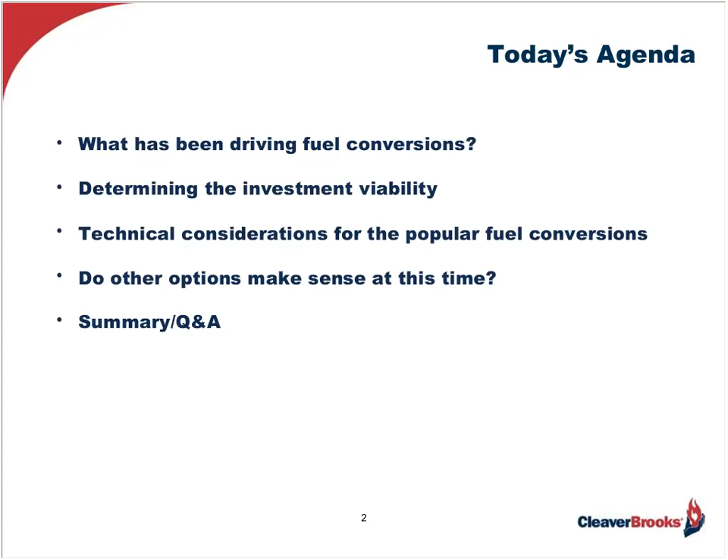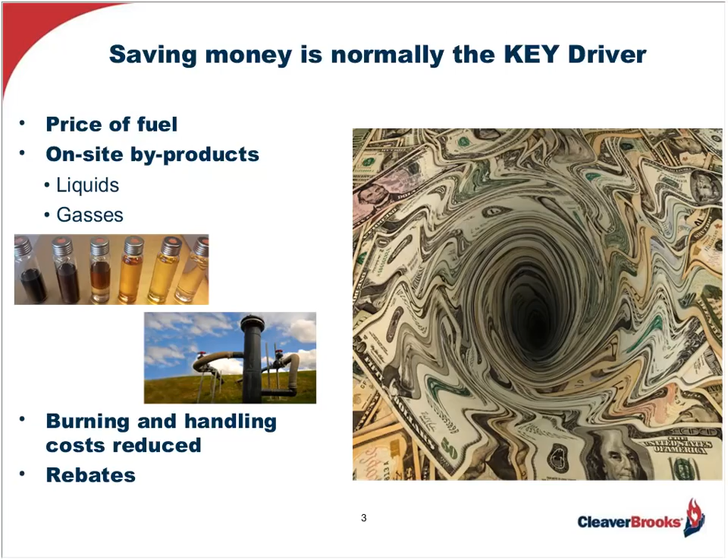Now, when considering what is motivating people to look at either adding a fuel, converting from one fuel to another, or just upgrading their existing equipment to burn a fuel more efficiently and reliably, the reasons are varied. But for the most part, the main driver is economics, or said another way, saving on that fuel spend. Unfortunately, if this is the only reason and one is uninformed on the other factors or the implications which might impact this fuel choice consideration, the expected savings can quickly become unexpected costs, but I'll address that in a bit. But before I do, let's look at the general possibilities for fuel cost reduction and where they may occur.

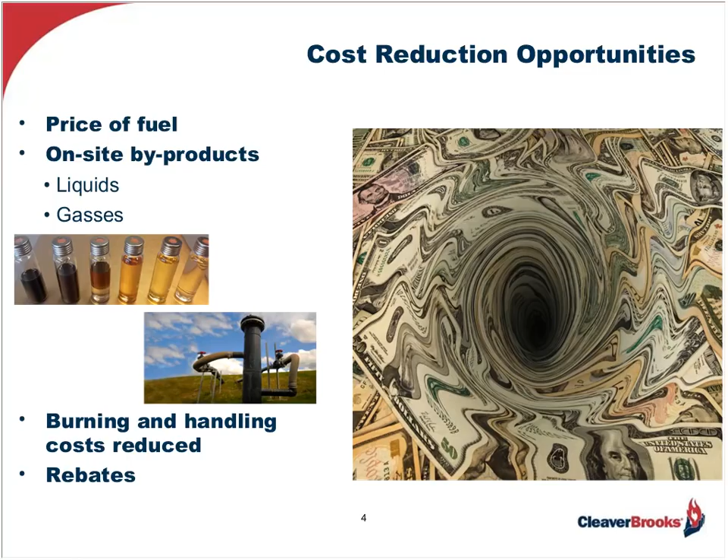First there's a possibility a lower cost fuel becomes available which was not present before, and this happens more than you would think. For instance, natural gas becomes available, and I'm currently burning either number 2 oil or propane. Now these two fuels, at least when I compare cost BTU to BTU, are more expensive. Then there's the possibility our manufacturing process may be producing combustible liquid byproducts, which we're currently paying to be disposed of. Or in the case of, let's say, waste gases, we're just flaring off. Or maybe we're burning a fuel which, when we look at the costs for burning it and handling it, can be substantially reduced if we change to a simpler fuel to burn. And lastly, if we have the capability to burn another fuel, it could lead to some very attractive rebates from either the utilities or other fuel manufacturers or both.

Now, the other major driver for fuel conversions is reliability, especially when we're involved with critical processes. And I think a good example would be pharmaceuticals. In many cases, a stop in the process can cost thousands of dollars, not an hour, but a minute. So having an alternate fuel backup can seriously help in making or breaking a financial month or a financial year.

The other major driver is local code changes, which normally equates to upgrades of existing equipment, but if it has to do with the EPA, the Environmental Protection Agency, it may indeed involve a fuel change in order to more easily and economically meet the required standards. For instance, changing from, let's say, burning oil to natural gas or propane will certainly positively impact NOx, nitrogen oxide, regulation limits. Then, of course, we have those situations where our fuel burning system is outdated, it's inefficient, and it's unreliable. So it's time for a change or a major upgrade to new burner equipment and maybe adding that change in fuel at the same time.

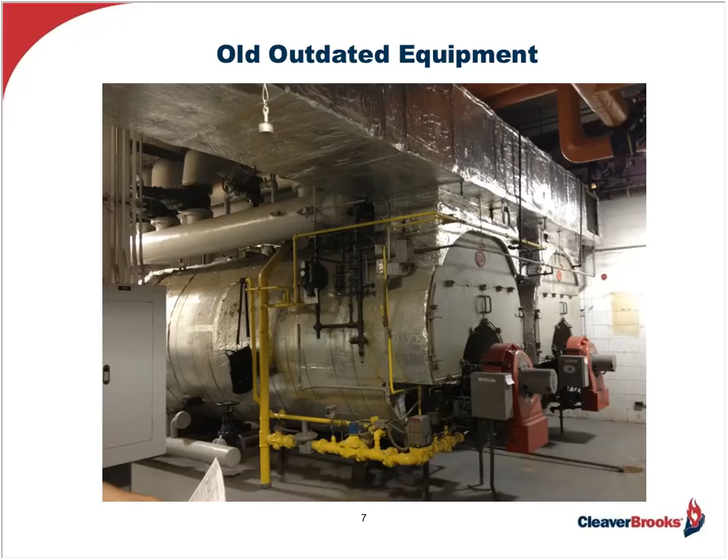And finally, we have the driver which has gained considerable legs over the past several years, and that's the environmental push. People across all walks of life have become so much more aware and educated about our environment, how finite our resources are, and how susceptible we are to dangerous pollutants, which can negatively impact us for generations. And as a result, we have many customers switching to cleaner burning fuels such as natural gas, while including NOx lowering capabilities to reduce the photochemical smog problem. Now, this, along with the burning of biofuels, which not only may save on the fuel spend while reducing pollution, but these fuels are also sustainable, all of which appeals to those embracing and highly prioritizing the environmental impact and the negatives associated with the burning of finite fuels with heavy concentrations of carbon.

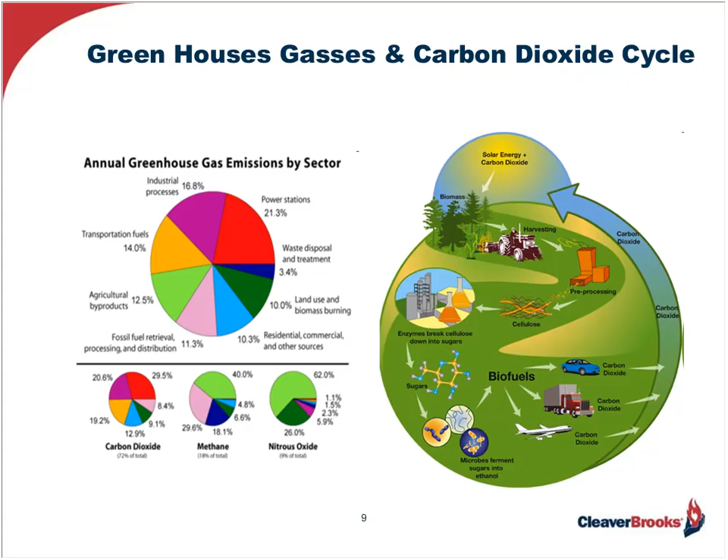Natural gas has been around for decades, and is the go-to fuel in many of our operations today. That's because of its benefits, starting with availability and the ease of handling. It's easily piped to the burner, and burning this fuel is pretty straightforward and uncomplicated too.

It also carries a very competitive price, especially since we in the United States have been tapping into many of the shale reserves discovered over the past 10 years, creating, albeit fluctuating, oversupplies.

Now, the other thing with natural gas, and this appeals to the environmentalists for sure, is its low carbon content, which lowers the amount of carbon dioxide released to the atmosphere, a precipitant of global warming, while also being clean burning, normally zero particulate.

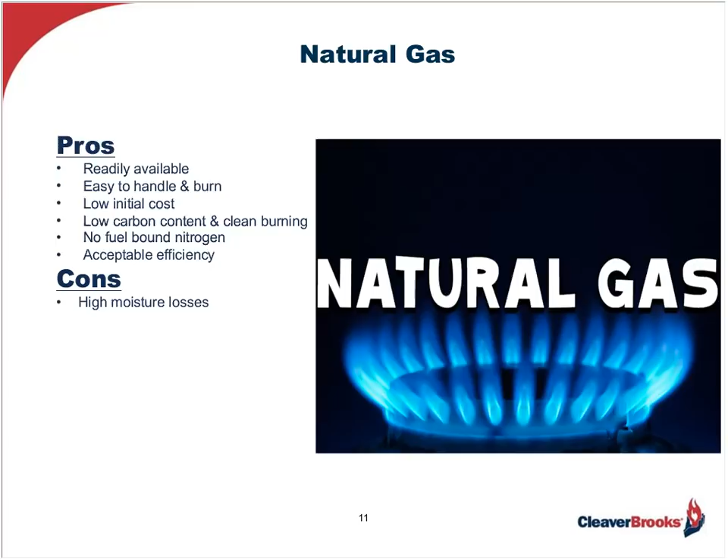Okay, what about the pros and cons for propane? Well, to begin with, just like natural gas, it's readily available. It's fairly easy to handle and burn, and I say fairly easy because it will require a vaporizer for burning it straight.

And a fuel-air mixer if it is to be reduced to the approximate BTU content of natural gas, which is about 1,000 BTUs per cubic foot, and then sent through the natural gas firing head in the boiler. In other words, use the same train. By the way, propane is about 2,600 BTU per cubic foot.

And like natural gas, it's clean burning, and because of its higher carbon ratio compared to natural gas, it has a higher combustion efficiency capability.

Now, on the negative side, propane requires on-site storage and the maintenance issues connected with that, along with assuring that supplies remain adequate. It has a higher carbon footprint, therefore more CO2 generation, which from an efficiency standpoint is really good, but not from an environmental perspective.

It's also more costly per cubic foot than natural gas, and if the propane is to be burned in the boiler without mixing with air to make it closer to natural gas, it requires a burner modification because of differences in the BTU content, the specific gravity, and so on.

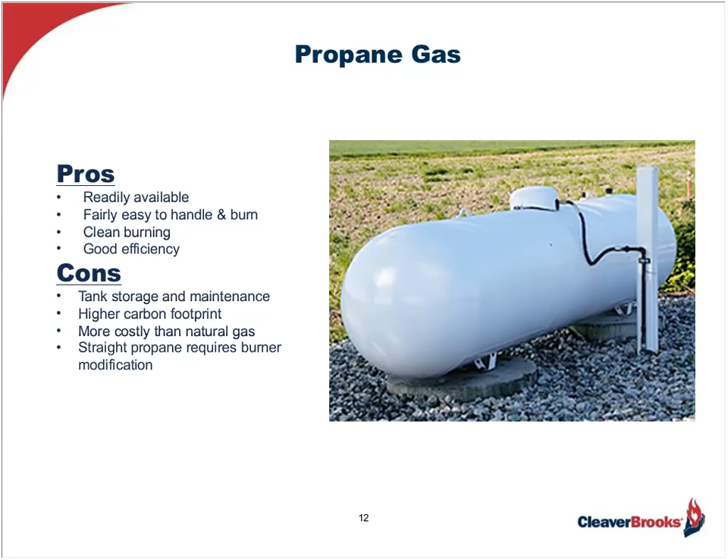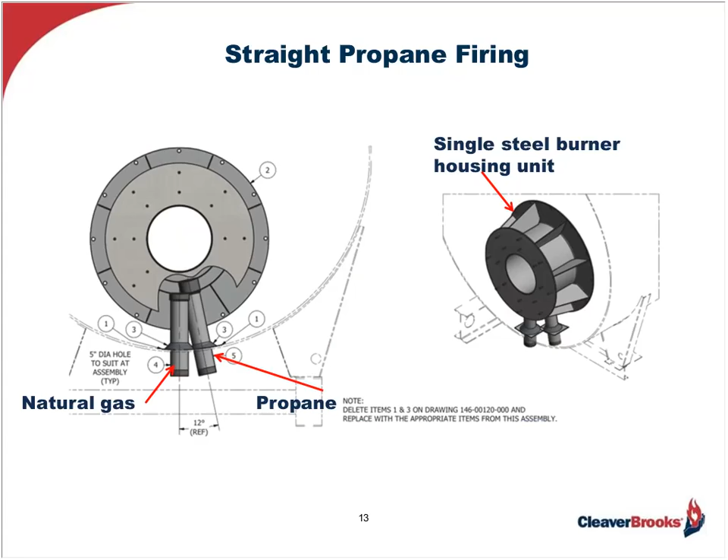That burner modification often affects the burner housing containing the orifices through which the gas emanates. In this particular example, we have what is referred to as a single housing, incorporating separate sets of orifices for natural gas and propane. They're separately compartmentalized within the same steel unit.

Now, as far as burning standard oils, let's talk about number 2, number 4, and number 6. Even though number 4 and number 6 have been pretty much regulated out in much of the country because of clean air restrictions, they're still used, but certainly not as commonly as number 2 oil. I think it's good to briefly discuss it anyway.

So when looking at the pros for both heavy and light oils, the first thing you have to say is they are both readily available. They're also delivering high combustion efficiencies, part of which is no moisture losses, making them an excellent primary or alternate fuel choice.

Now, when considering the cons for heavy oil, handling is an issue, including the need for heating it to the proper viscosity, I'm talking 200 Saybolt universal seconds, and the need for atomizing it with compressed air in order for it to exit the nozzle with sufficient misting and volatility for proper combustion.

The storage tank, housed somewhere in the boiler room, has to be heated in order for the oil to be pumped to the burner and then back to the tank when that burner is modulating and not as much oil is being burned.

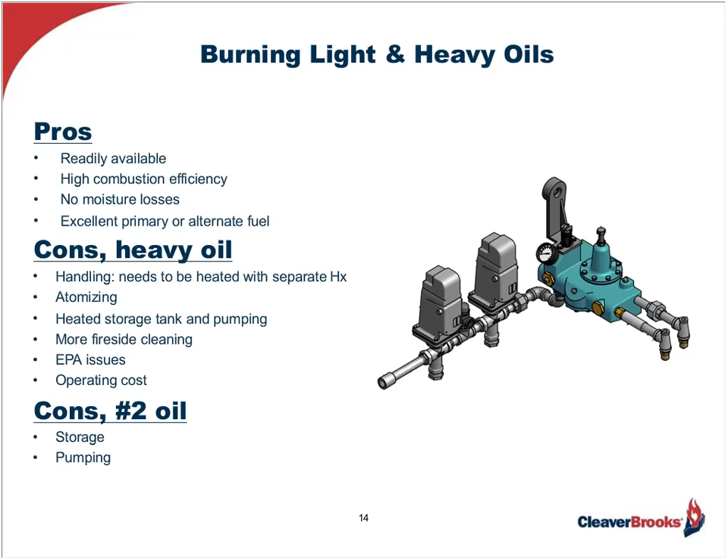But we still have to contend with the storage tank, though it's unheated, and pumping to and from the tank. Cleaning is probably going to be more frequent than when burning natural gas, and as a result, total operating costs, including the price of this fuel, are going to elevate.

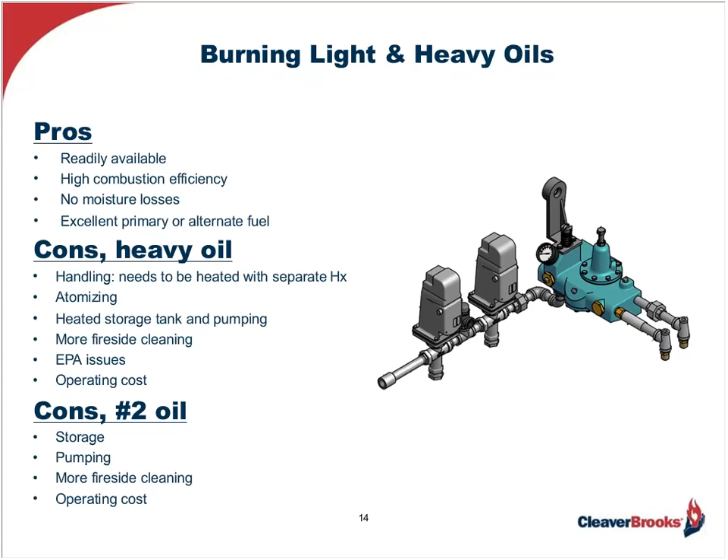Now, I might also add that an air compressor may be part of some burner packages to atomize the fuel, similar to heavy oil, but many manufacturers also use mechanical or pressure atomizing nozzles, thus not requiring a compressor in that particular application.

Okay, what about biofuels? Well, you know, this term is often used collectively and interchangeably, but if we break it down into the fuels within the heading, we find it consists of solids, of gases, and of course we have liquids. And what they all have in common is they are all sustainable because they're renewable.

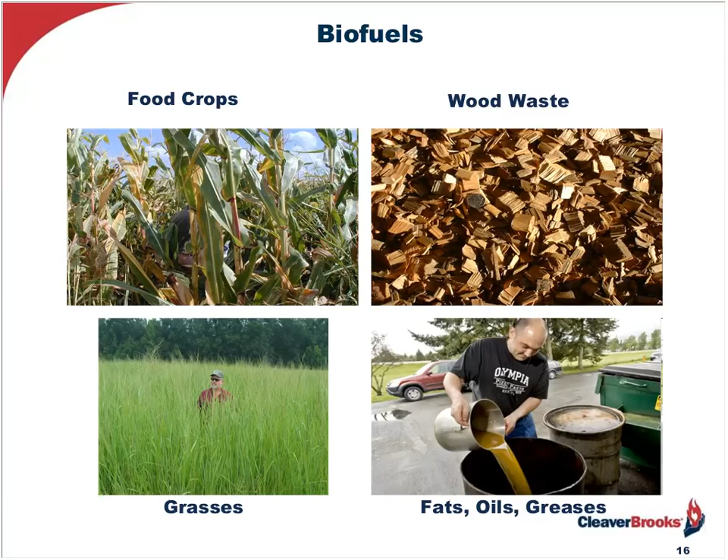For instance, we have solids such as corn, sugar cane, and grasses to make fuels such as ethanol. We have wood waste, which can be burned in boilers. And then we have various processing operations generating waste oils. We also have stores and restaurants generating fats. And they all have BTU value, and they can all possibly be burned in a boiler.

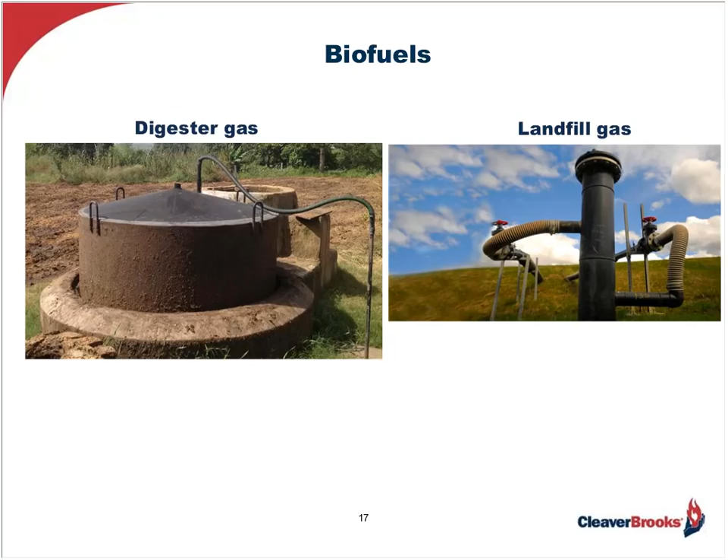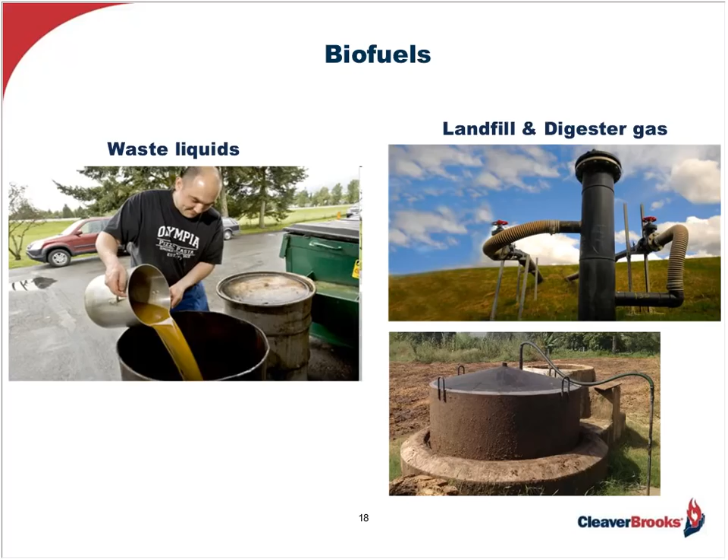We also have plenty of landfill sites and sewage treatment facilities producing primarily methane gas through what we call a microbiological degradation process. Now, this can be burned in boilers as a primary or alternate fuel based on the quantity and the ready availability of the supply. So for our discussion today, because of time constraints, I'm going to limit it to landfill and digester gas, both very similar, and then we'll talk about waste liquids.

And we'll start with landfill and digester gas pros and cons. Looking at the pros, this fuel is very inexpensive and maybe even free if the generating process is in the plant, and that's where the boilers are located. And next, it's a sustainable and renewable fuel, and it's environmentally friendly, having a very small carbon footprint.

Now, as for the cons, this fuel has a very low BTU value, probably about 500 BTU per cubic foot versus natural gas at about 1,000. So you need to burn more of it to meet the boiler's capacity. Now, it's also delivered at a very low pressure, meaning the gas train has to be larger to reduce pressure drops, or an expensive gas pressure booster needs to be added.

And it can be very corrosive with large amounts of sulfur contained within the gas. This means not only does the gas train need to be larger or the pressure boosted, but it also needs to be constructed of stainless steel, including the valve parts that would be coming in contact with this gas.

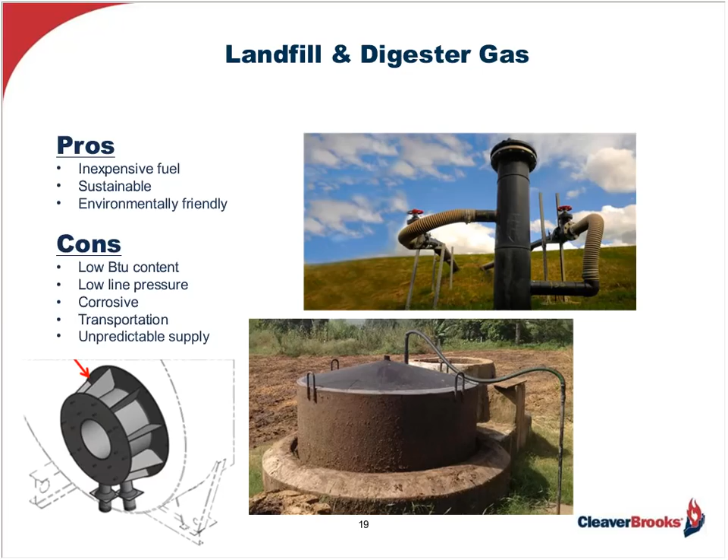And then we have the transportation issue. If you are not generating the fuel yourself on site, you need to be next door to the supply to be able to use it. And then finally, the supply can often be unpredictable, meaning this is most often burned as an alternate fuel when the supply is sufficient. This means if your primary fuel is, let's say, natural gas, you'll have two separate gas trains possibly coming into the same housing, that dual canister housing that I showed you before.

Okay, let's now take a look at waste oils and the pros and cons for using these fuels, which might be coming from waste oil recovery services, food services, meat processing, and maybe some chemical or pharmaceutical manufacturers. As far as the pros are concerned, they can be inexpensive to buy, especially if generated in the same plant, in which case the cost is zero.

But even if not, the generator of these fats has to pay disposal costs. So the price to the user may be very low, possibly just having to pick it up.

Secondly, normally these waste fuels can have significant BTU value and can burn at a high combustion efficiency. And of course, they're sustainable, which leads to some environmental pluses, especially when they are being gainfully employed and not dumped into the sewer, into fields or rivers.

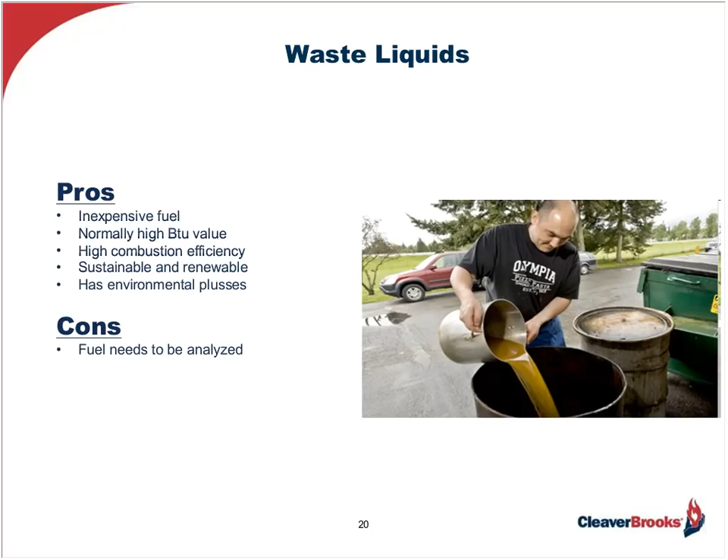Now, as far as the cons are concerned, these fuels need to be analyzed by the manufacturer of the burner equipment to make sure they can be burned without causing excessive deterioration of mechanical components, that they provide the benefit expected, and do not pose significant safety issues. Now, once that hurdle is crossed, the system has to be specifically engineered to assure proper combustion and maximum efficiency.

Now, this, by the way, might involve handling the fuel similar to what I previously outlined for heavy oils, such as preheating, atomizing, and so on. And then finally, there may be some air permitting issues to be addressed based on the constituents found in the fuel analysis.

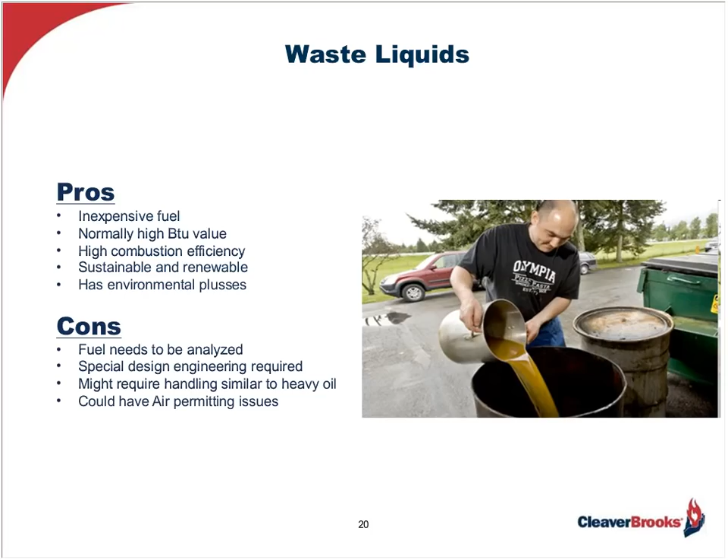All right, so we've covered the popular fuels being considered for conversion, including their pros and cons. So let's say we decide to further the process. What's the next step? Well, you know, if it were me, I'd make sure the boiler I was investing in was in decent shape.

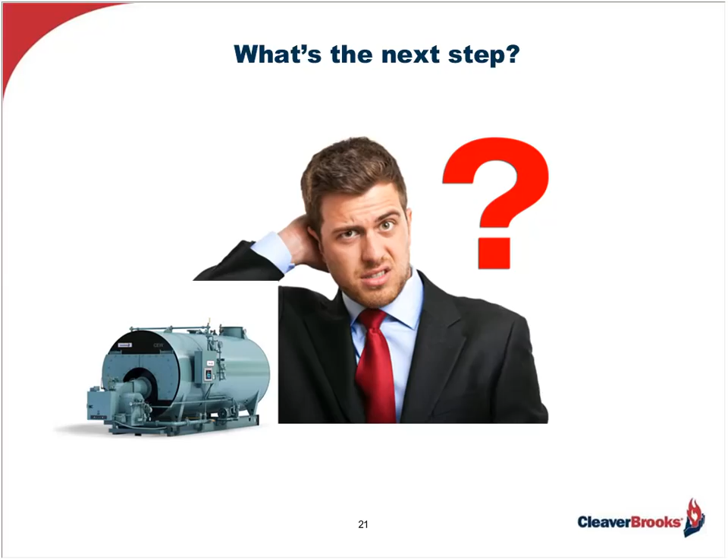You know, why invest in a dead horse, so to speak? Maybe it's time to make some upgrades with a boiler that still has life, or maybe it's time to think about another boiler, either a new one or a used one. In other words, take a hard look at the boiler and its key components to assure that they are sound before investing in the fuel change.

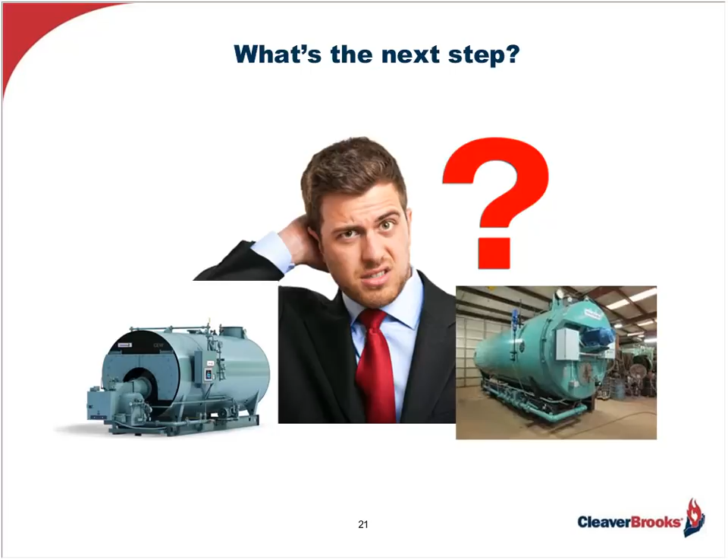And I'd start with the burner. Number one, is it in good shape, and does it provide good combustion efficiency throughout its turn down? And don't judge the book by the cover. These burners look like they've seen better days, but they actually perform very well.

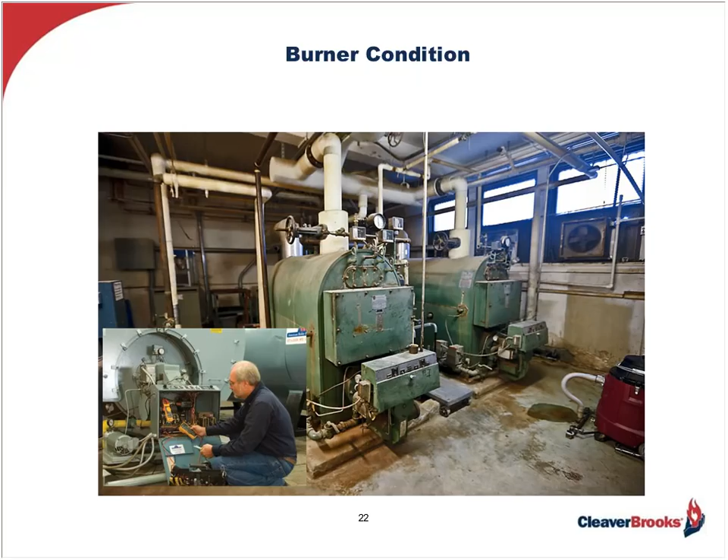Or maybe it's time to replace that burner, adding the fuel you intended to convert to. But in either case, keeping the burner you have or buying a new one, they have to be capable of burning the new fuel efficiently and reliably and safely.

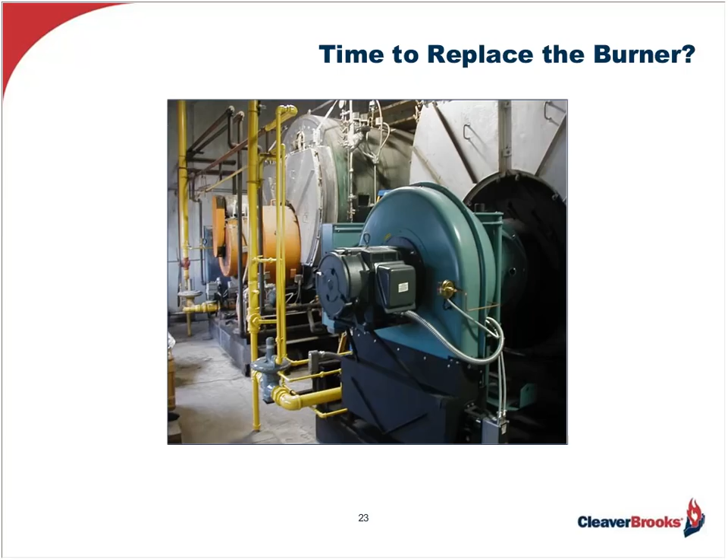Then it's on to the pressure vessel, making sure it isn't corroded or leaking or heavily scaled. Now, these can all be fixed, but the investment may just not be worth it.

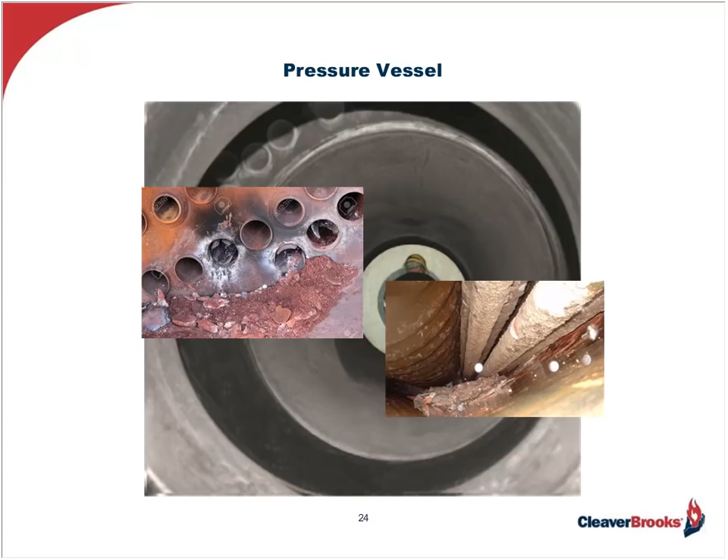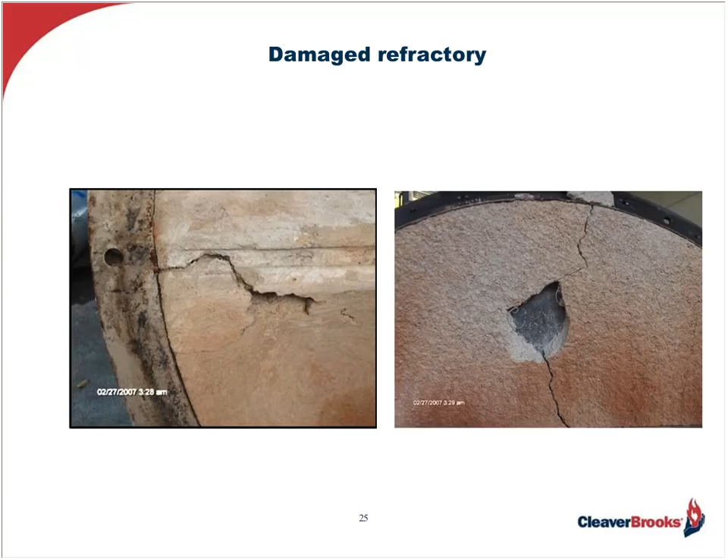And speaking of fixing what is wrong, fixing or replacing refractory insulation is a no-brainer. If it is compromised, as you see some examples of here, fix it as soon as possible, or efficient energy production will be sacrificed, along with serious mechanical and structural failures with the boiler following soon after.

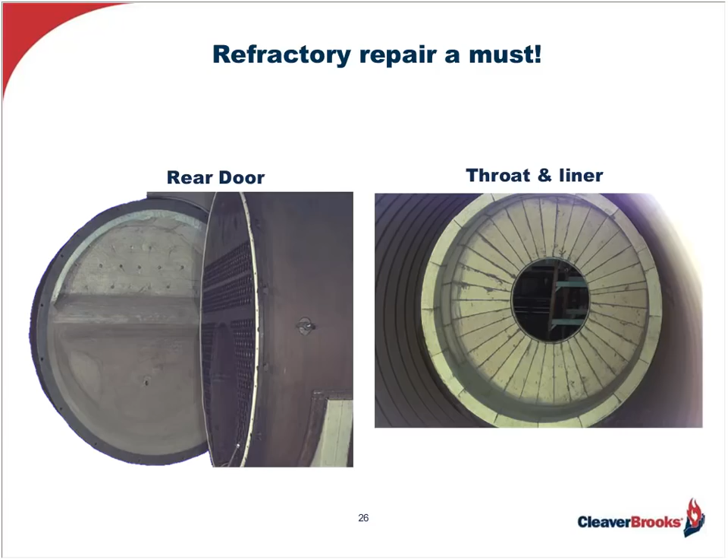Okay, we've decided the boiler is worth the investment. What does the conversion supplier normally provide with these fuel conversions?

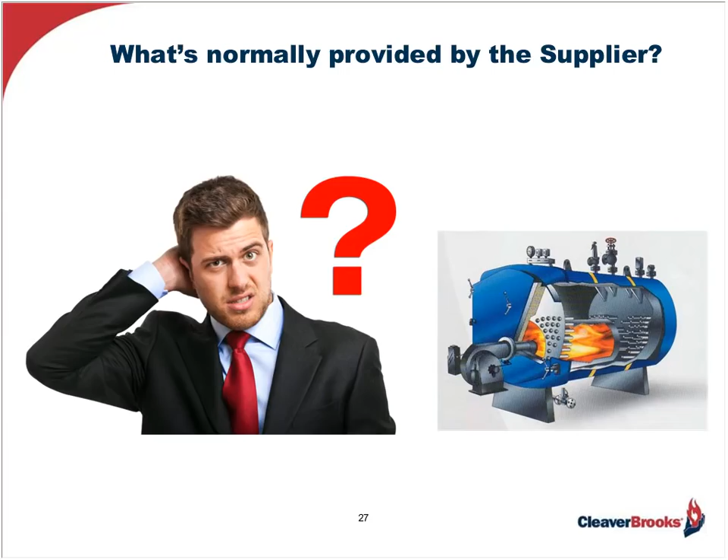And again, because of the limitation on time with these webinars, I'm only going to cover adding a natural gas conversion to a straight number 2 oil-fired boiler, and then we'll do just the opposite, go through a heavy oil to straight gas-fired boiler, because the heavy oil conversion also comes close to what we might find when adding a waste liquid fuel firing capability.

So overall, this should give you a good idea of what the supplier provides, regardless of the fuel being added or converted to.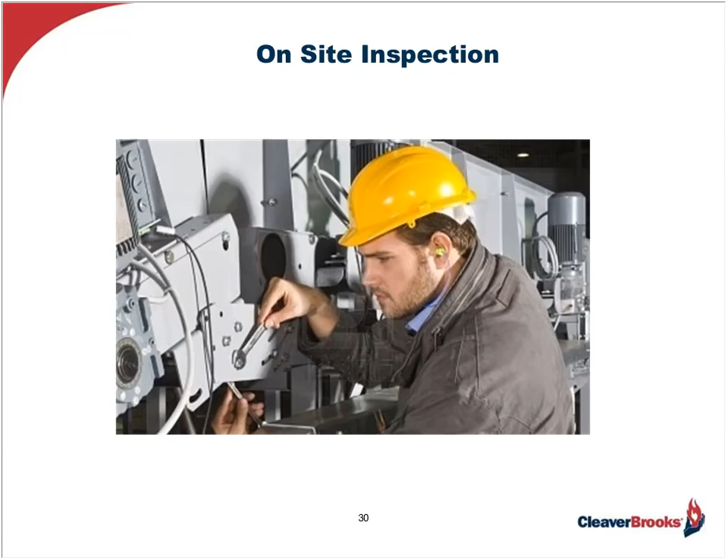So, starting with the natural gas conversion. The supplier has already had an experienced field engineer at the site to analyze the logistics of the room, including the existing utilities, as well as the details about the boiler, the existing burner configuration, along with its conversion adaptability, and then special note is given to the furnace into which the burner will be firing.

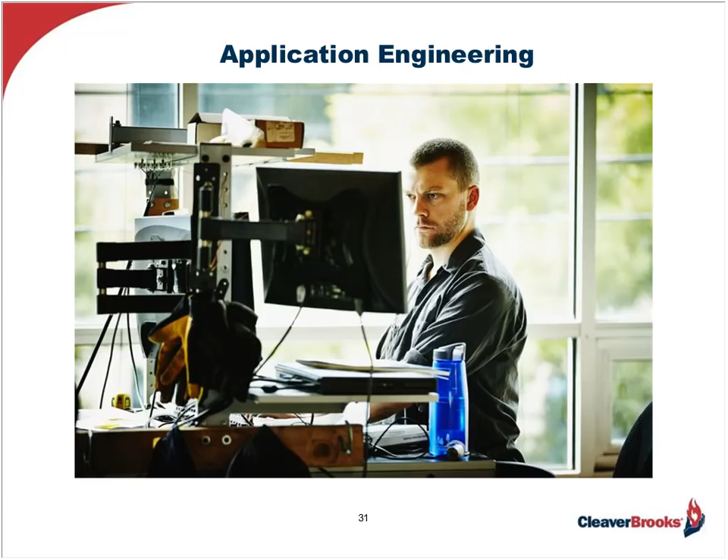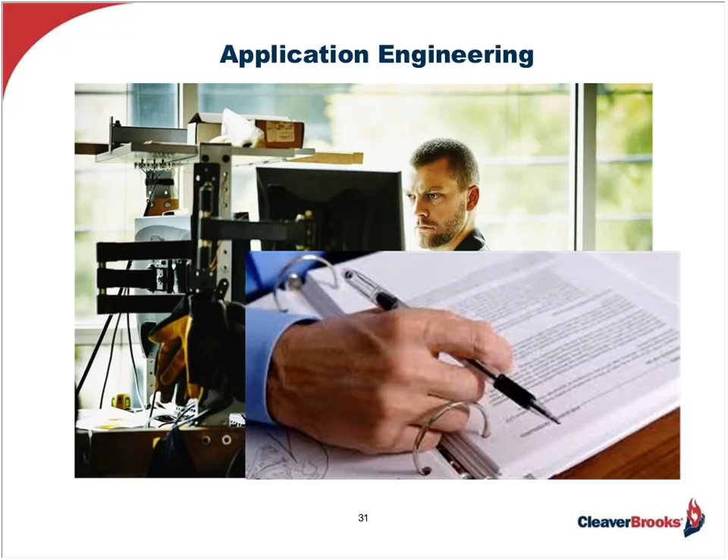Now, this information is then sent to the supplier's engineering department, who analyze the existing conditions that have been provided by the field engineer, and then determine what will be required to match the need and the existing boiler room conditions. Now, after the review is complete, a tailored engineered solution is determined and then documented in a formal proposal for the customer, including all the components required for the conversion and also including the labor to install it.

Now, in a gas conversion, what is normally proposed and supplied is a new burner drawer. An example is, as you can see in the upper right-hand corner of the screen now, and that's for accommodating the main natural gas supply and including the gas pilot. This drawer would also then have provisions for accommodating the existing number 2 oil.

Next, we will need a new burner housing in which the drawer fits, and it will include the entrance port for the main gas and the gas burner ring as indicated here. We then have the gas train components as displayed on the screen, including all the required piping, valves, switches, and the complete pilot train.

The fuel-air ratio control linkages, as seen in the lower left corner of the screen, are also included, and you may have a choice to go with the linkage system or the parallel positioning system that uses servo motors with a central controller, and that's also shown here, as you can see.

You'll probably also find control components to be wired in and mounted for easy fuel selection, a fuel selector switch. The package is then completed by supplying the required fireside gaskets, a wiring diagram, and of course a new nameplate that now will be including the added fuel usage.

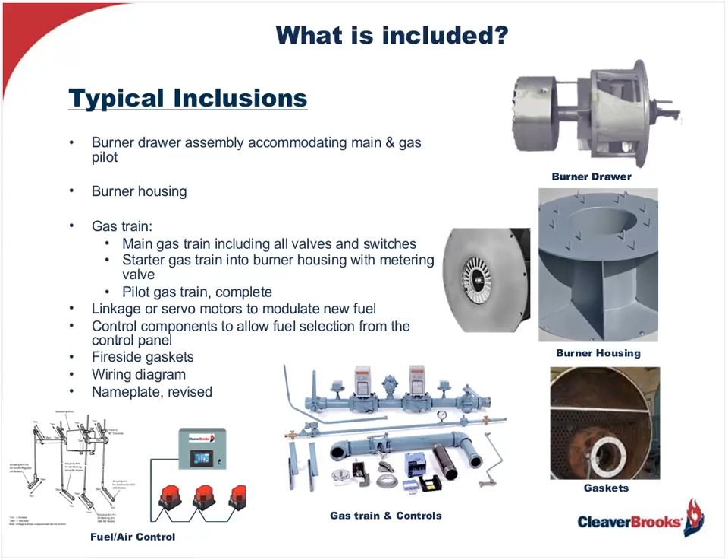Now, the other thing I wanted to bring to your attention today is the new unitized gas trains that have come on the market. On the screen, you see the old standard gas train with large valves and fittings, including the vent connection between the two motorized valves, and not shown is the gas pressure regulator that would be mounted upstream.

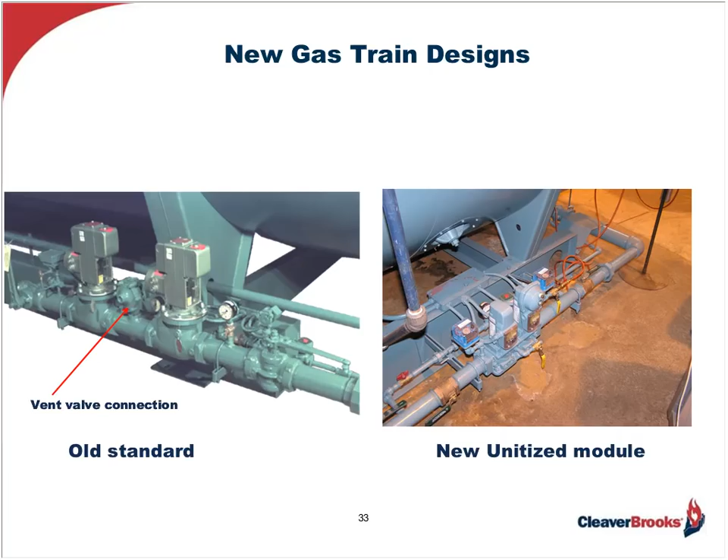Compare this to this unitized gas train module, complete with motorized valves providing a much lower pressure drop, meaning smaller diameter piping can be used, which saves not only on the valve components but the piping cost as well. Besides being fully assembled, these trains incorporate an integrated gas pressure regulator, which experiences less pressure droop when the valves initially open, positively impacting flame stability.

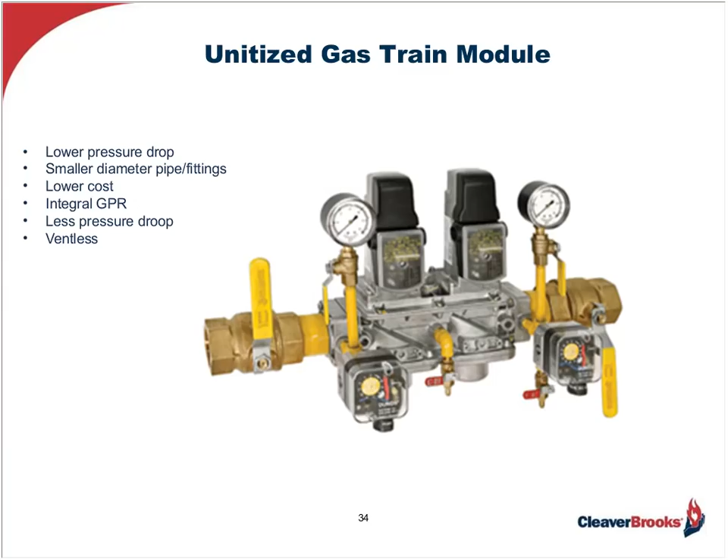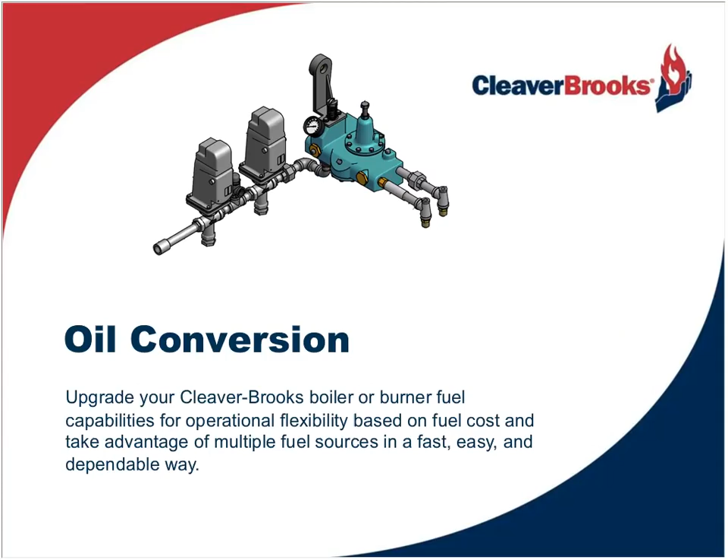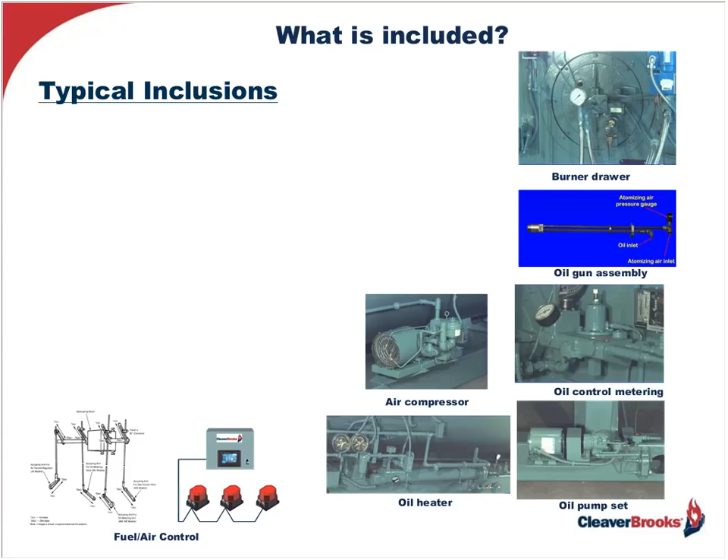All right, let's turn our attention to the liquid side. I'm going to detail a number 6 oil firing conversion, as this comes very close to many waste liquid fuel burning applications, such as waste oils and waste fats. With this type of conversion or addition, most everything is provided by the supplier, similar to the gas conversion, and starts with a new burner drawer, including the provision for the gas pilot or oil pilot, though gas is the preferred option and found to be most reliable.

It will also include the complete gas or oil pilot train, the oil gun assembly with integrated oil supply and primary airline for atomizing the fuel, the fuel oil control and metering system, and of course an oil pumping system, along with an air compressor module if plant air is not available for fuel atomizing. And because this fuel has a heavy viscosity, an oil heater is required.

Similar to the gas conversion, fuel-air ratio control will also be included, and again it can be either linkage-driven or motorized control. As before, the package is rounded out with the electric fuel oil selector switch or fuel selector switch, fireside gaskets, wiring diagram, and a new nameplate.

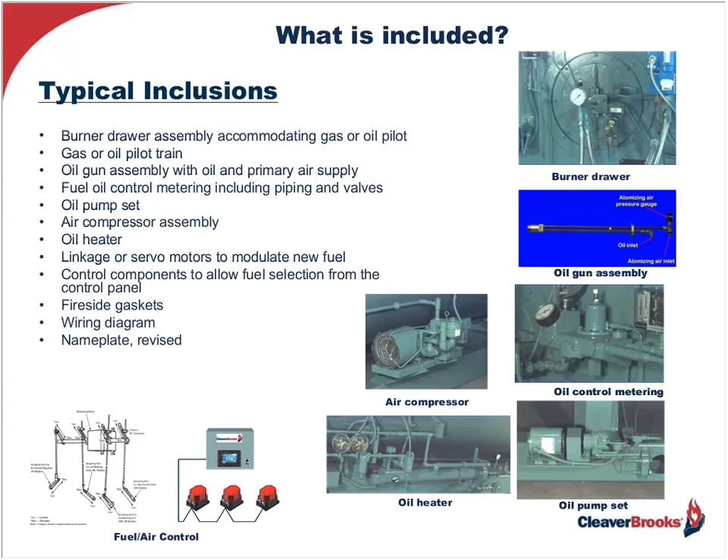Once the total package or kit arrives, it's very important that it be installed by a qualified technician who truly understands what needs to be done and can do it with a minimal amount of time and disruption for the customer. This normally involves a close tie with the supplier and the resources that he or she can provide if necessary.

Now, over the years, at least in my experience, customers have taken this time while converting from one fuel to another or adding a fuel firing capability to take stock and see if now isn't a good time to make some other upgrades. As a matter of fact, there are cases where a customer has multiple plants, and one has a boiler which has been decommissioned and is only being used to salvage parts, while another of its facilities is looking to add natural gas.

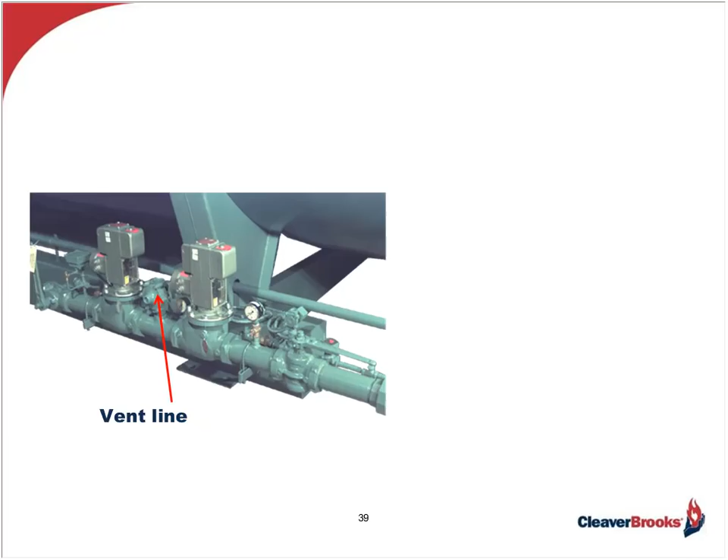In this case, the gas train is taken off the decommissioned boiler and sent to the other facility, saving the cost of the gas train. However, it will need to be piped properly, having a vent which goes up through the roof for safe discharge of the gas that's trapped or leaked between the two motorized valves, unless they add a ventless option.

A ventless option includes a new burner management system and end switches on the gas valves, which are electrically tied into the new burner management system, specifically designed to receive these signals, thereby proving when the valves are open or closed. In this case, there's no need for a vent line, because the only gas remaining will be the small amount trapped between the valves, which will pass to the burner once the cycle begins and the valves open.

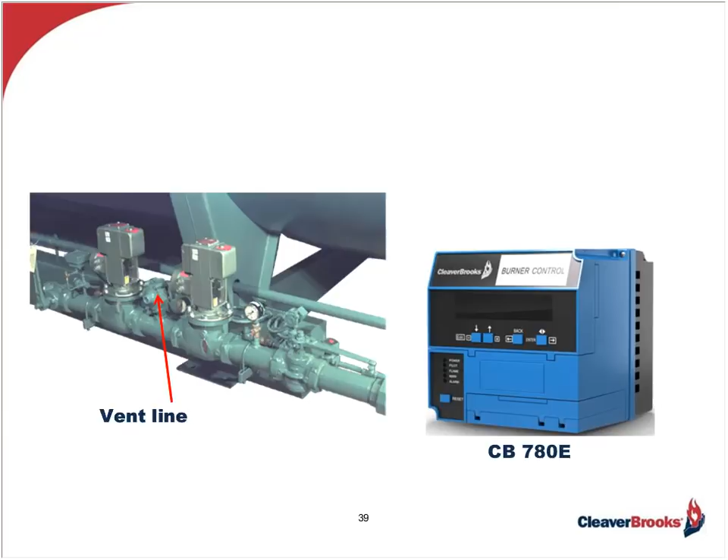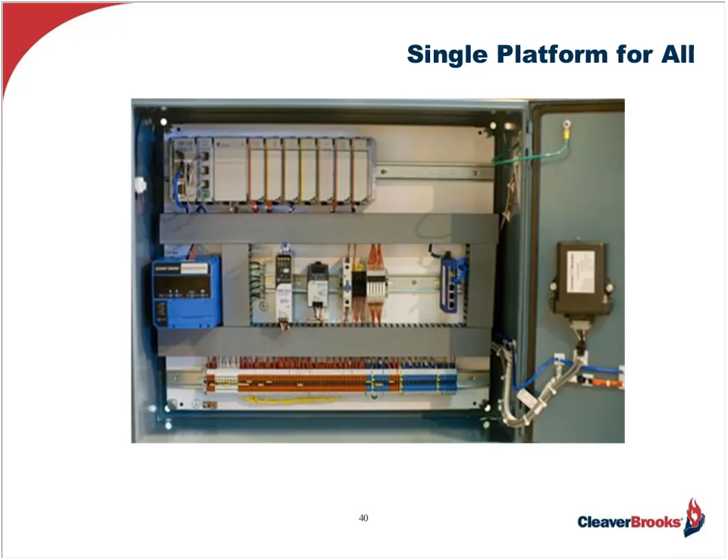And speaking of burner management system updates, maybe now is the time to incorporate the new burner management control into a PLC-based platform, giving the operators and facility staff numerous opportunities to tie in and monitor any number of functional operations. For instance, we've added digester gas firing capability and can now automatically switch to natural gas when the supply runs low, or add variable speed drive to the boiler's combustion air fan.

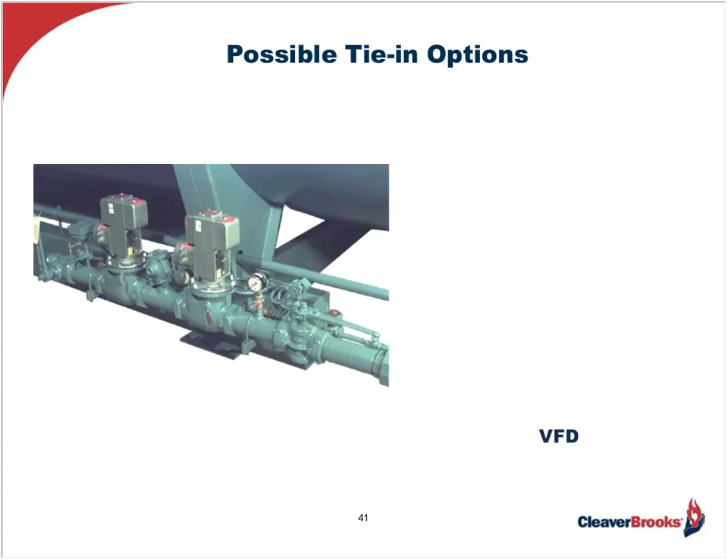This saves significant amounts of electrical energy if the boiler modulates while tracking a varying load.

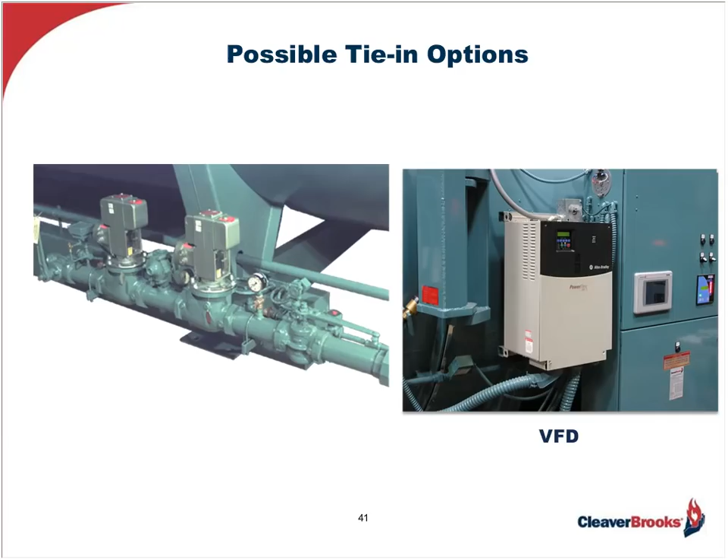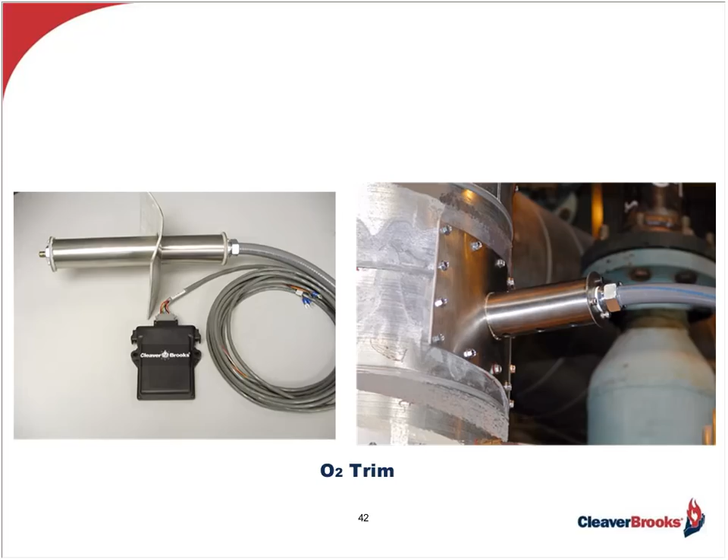The PLC platform can also accommodate and integrate oxygen trim, which compensates for uncontrollable and varying conditions such as ambient air temperature changes and barometric pressure changes, keeping the burner's fuel-air mix at the proper ratio for maintaining optimum tuned efficiency and safety. And then there's the auto-powered stack damper, automatically closing when the boiler cycles off.

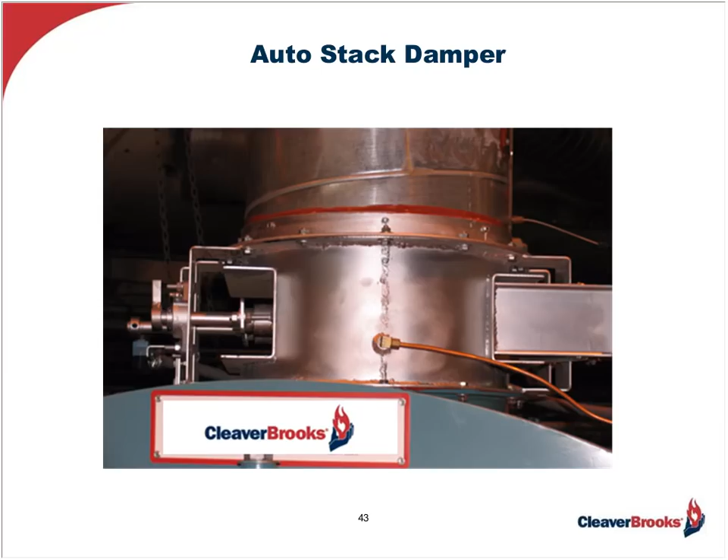This makes good economic sense because without it, and if the stack pulls, let's say, a draft of over 1 inch of water column, you have much cooler ambient air rushing over the heated surfaces of the boiler and cooling it down. And then when the boiler cycles back on again, this loss has to be made up by the burner in order for the saturation temperature to be reached in the boiler, and it's all dollars lost up the stack.

And speaking of dollars lost, what about the stack losses? You know, I know I've talked about this before, but not in this context. Upgrading to a PLC-based platform can integrate this feed water preheating system into the total scheme of energy-saving options.

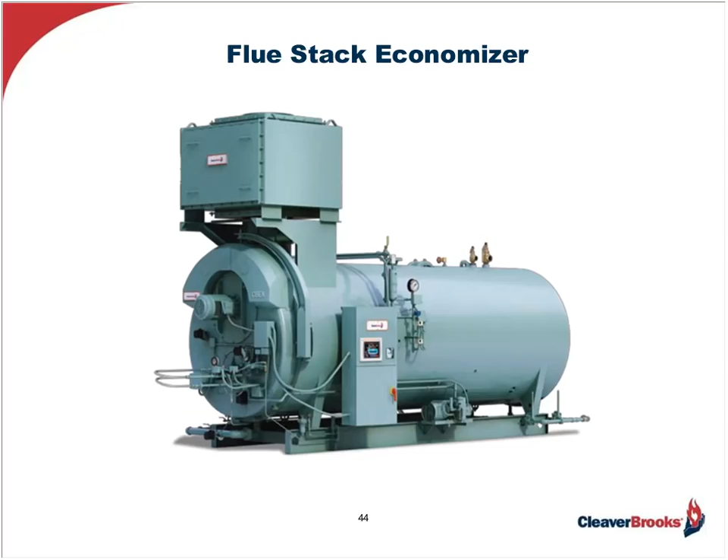Where did I leave off here? All right.

So what I'm saying here is you have this color touch screen, and in this case, you can readily see the operating pressure of the boiler versus the set point. You can see the incoming feed water temperature, the temperature into and out of the economizer if you have one, the variable frequency drive output if you have that, the stack oxygen reading along with the operating efficiency. And you know, the more you know, the better you can control.

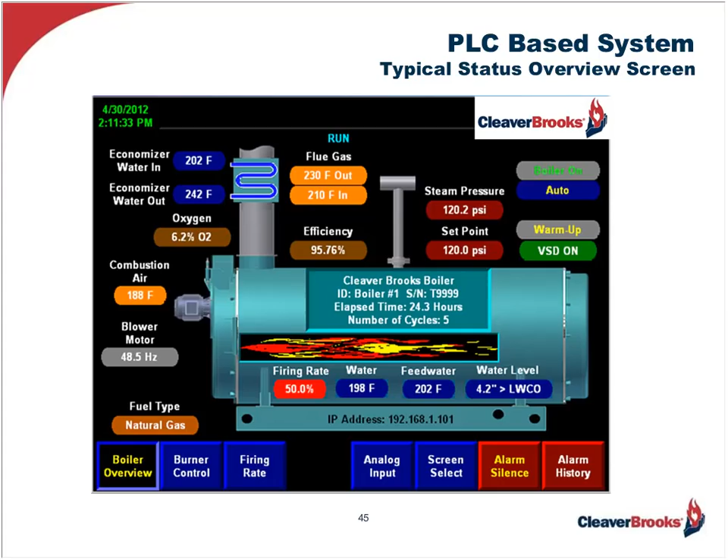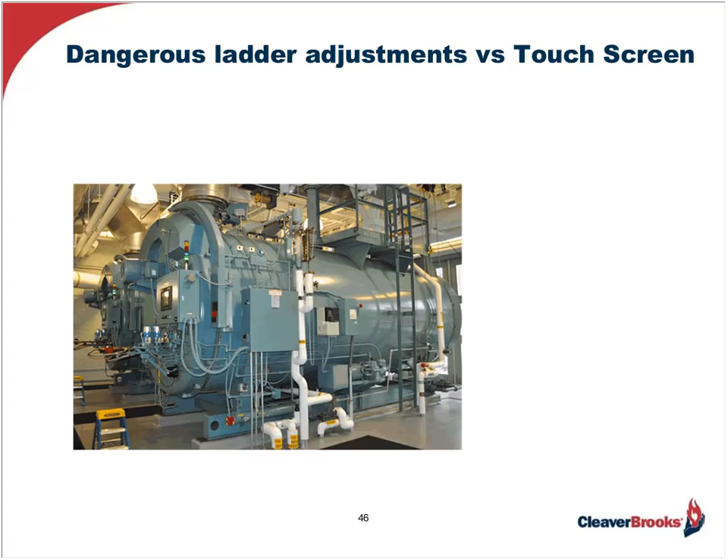And, you know, I mentioned operating pressure and temperature versus set point. These boilers, as you can see on the screen, can get pretty high. I mean, 10 to 12, 15 feet to get to the pressure or temperature controls to reset them is not at all uncommon. So this means that you have people on ladders, and people being people and getting distracted, they can fall, and that can be serious.

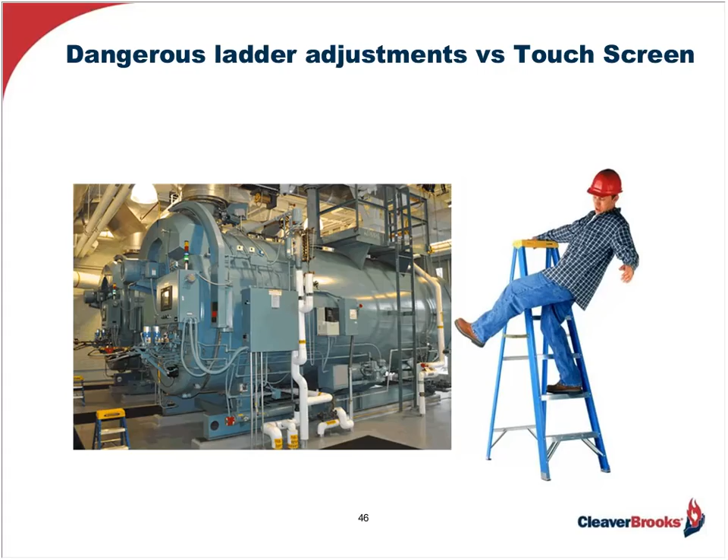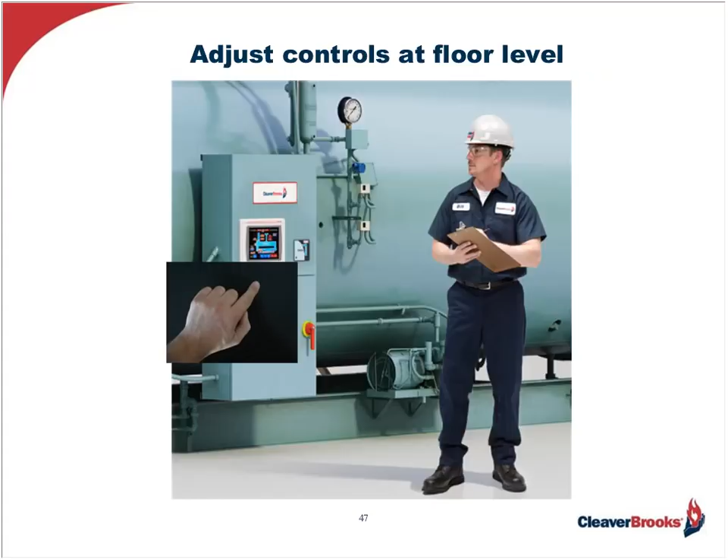Whereas with these PLC-based controls, all the pressure temperature control adjustments are performed at floor level. And with the touch of the screen, couldn't be simpler and certainly couldn't be safer. And finally, these systems can provide interconnectivity of everything in the boiler room, not just the boiler and its accessories, as I mentioned, but all the accessories in the boiler room, including the water treatment equipment and the boiler feed, such as the vented receiver or the deaerator.

And you know, as I've said so many times in the past with these webinars, knowledge is power. The more you know about a complete boiler room system and how it's performing minute by minute, the more you can positively impact efficiency, reliability, and safety. It just makes a whole lot of sense, not only logically, but in the financial sense too, and in that case, I would spell it C-E-N-T-S.

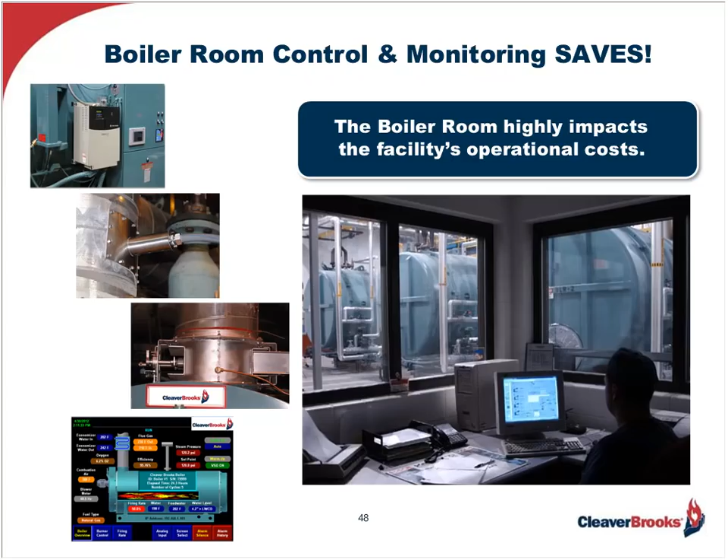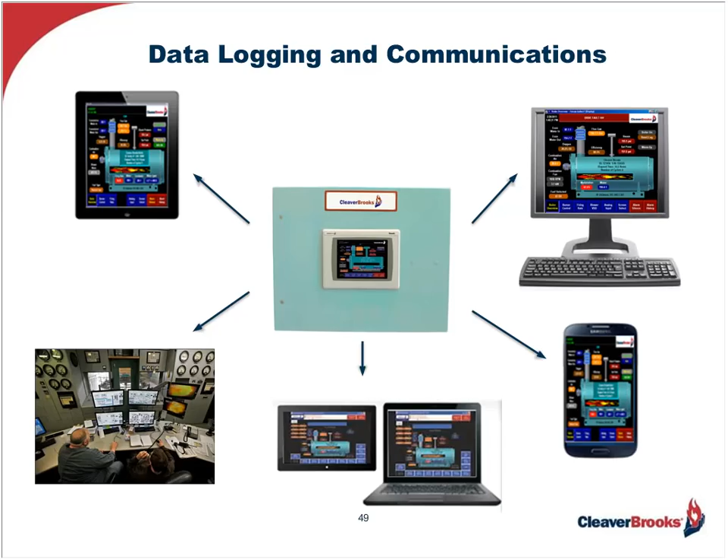And when I talk about knowledge being power, it starts, of course, with training and education for sure, but then equally important, you need a strong communication system to transfer the information to the people who can make a difference. And that's exactly what these PLC-based platforms allow us to do through various communication tools, be it a handheld smartphone as you see here, a laptop, an iPad, or a desktop.

The integration with these PLC-based platforms is virtually limitless, as it allows us to connect to the company's far-reaching SCADA systems, for instance, for the monitoring and control of the entire industrial operation or complex. Pretty mind-boggling. What I've seen over the last 50 years as I note the strides in this industry, which was so stodgy for so many years, evolving dramatically over the last 20 years, and it has been primarily through the adaptation of the advanced industrial control technologies and incorporating these on our boilers and our boiler accessories, making them so much more efficient, reliable, and safe.

Pretty amazing. Okay, I'm sorry about that interruption a minute or so ago. I don't know exactly what happened. Amazing technology, as I was just saying, right?

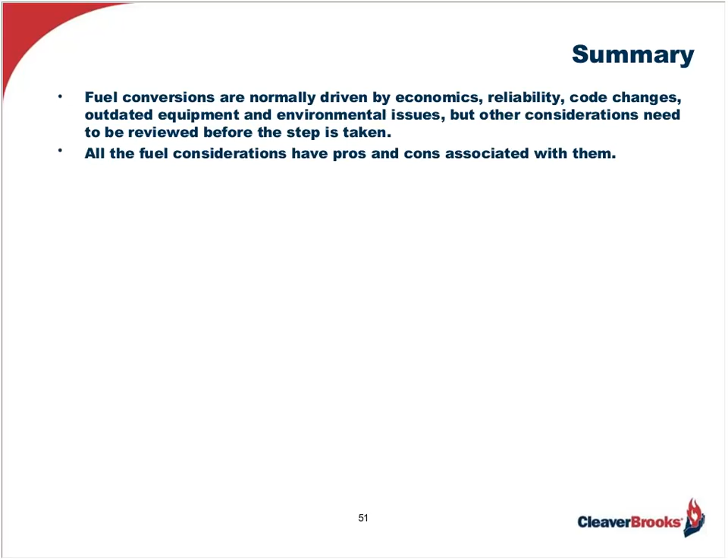Anyway, here's some of the takeaways. Fuel conversions are normally driven by economics, reliability, code changes, outdated equipment, and environmental issues, but other considerations need to be reviewed before that step is taken. All the fuel considerations have pros and cons associated with them, and I think I went through the major ones. The biofuels can be divided into solids, gases, and liquids.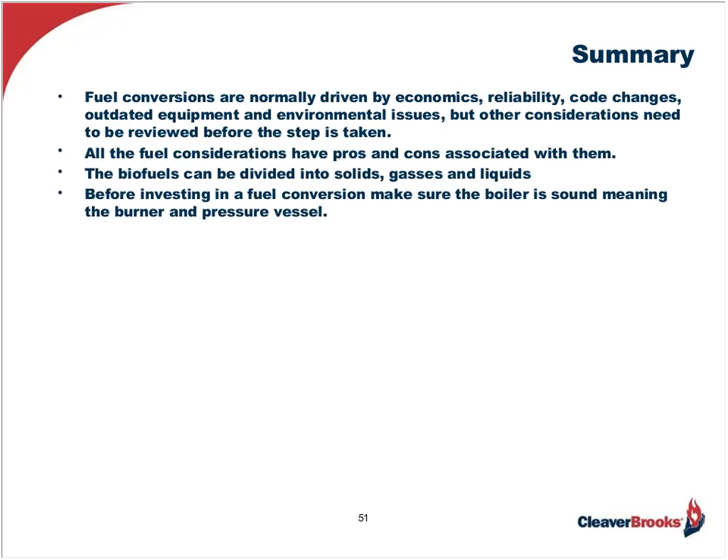Before investing in a fuel conversion, make sure the boiler is sound, meaning the burner and the pressure vessel. A good fuel conversion retrofit requires an experienced field representative and strong supplier with engineering know-how and experience. Fuel conversions involve burner adaptations, including the fuel air handling, piping assemblies, refractory repairs, and controls.

Gas trains have changed, now including unitized assemblies offering lower pressure drops and zero vent pipe purging of leak gas with a BMS, burner management system, and gas valve switch adds. Those are the proof of closure switches on the gas valves. Fuel conversion is normally a good time to assess going to a PLC-based control platform.

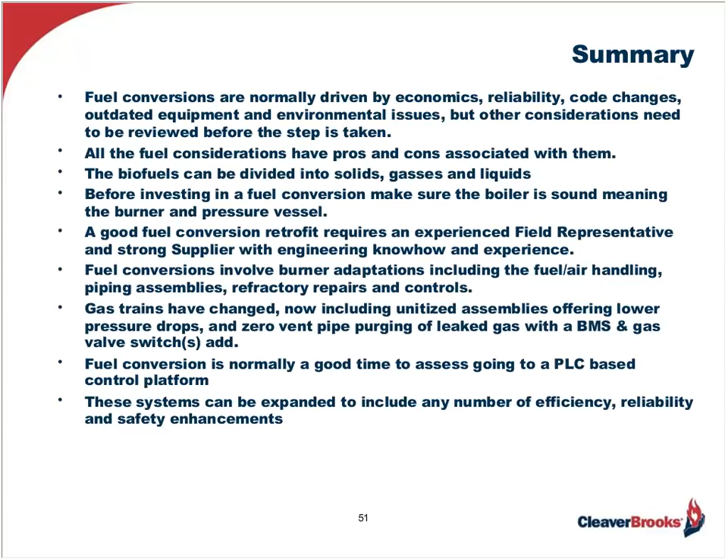These systems can be expanded to include any number of efficiency, reliability, and safety enhancements. And they can also be connected to the company's building management system, process system, other far reaches of the facility, or the company's broader campuses through a SCADA system. Okay, so it's